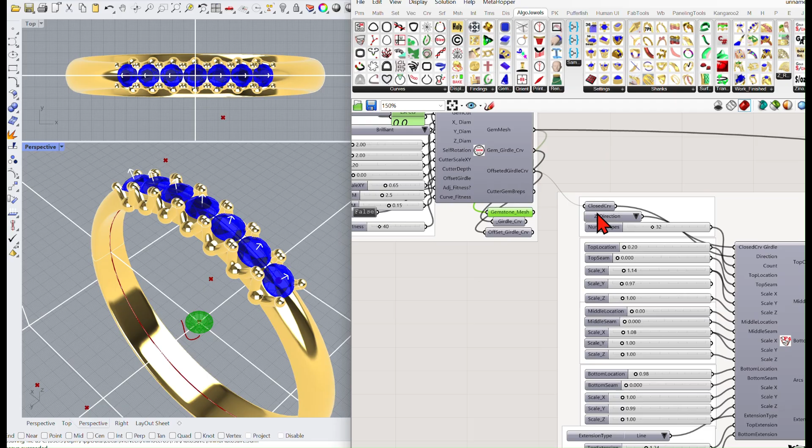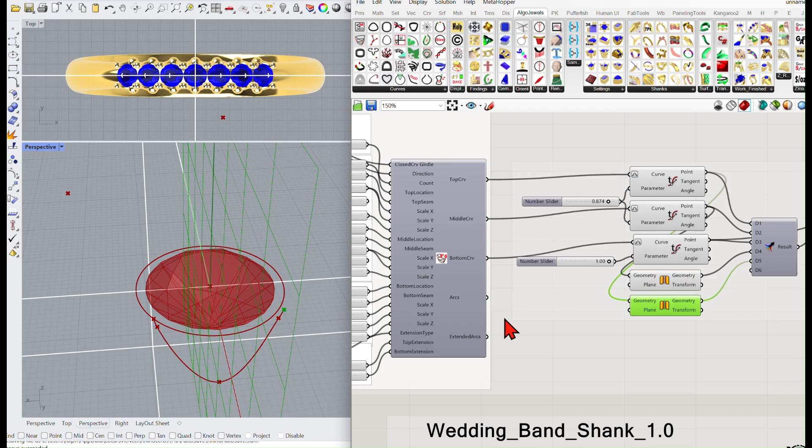We're using a closed curve, which is the offset curve. From the offset curve, we're using points, points, points, points, points, creating this curve.

That we are piping to create the claw here and the sphere here, which we are grouping together.

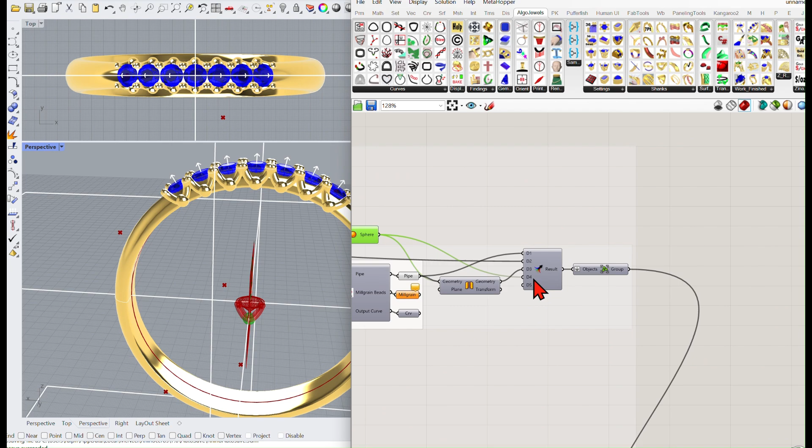And then we are using orient to curve. To find the curve, we're using the wedding band maker. We're using the B-rep to get a surface.

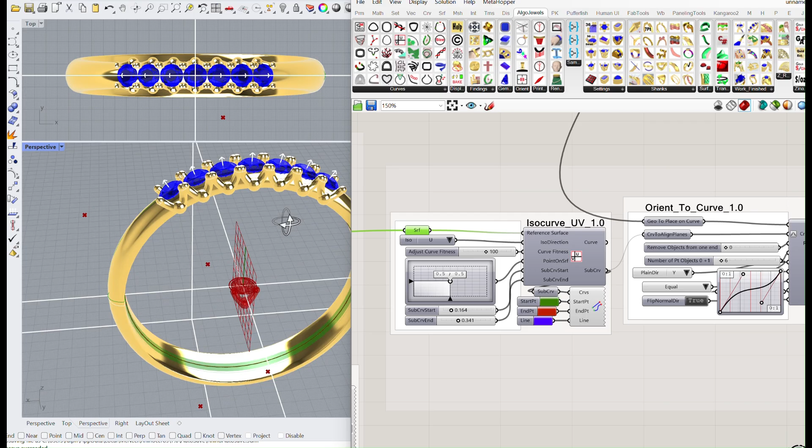And from that surface, we're creating a subcurve. And then using orient to curve to orient these claws onto the ring.

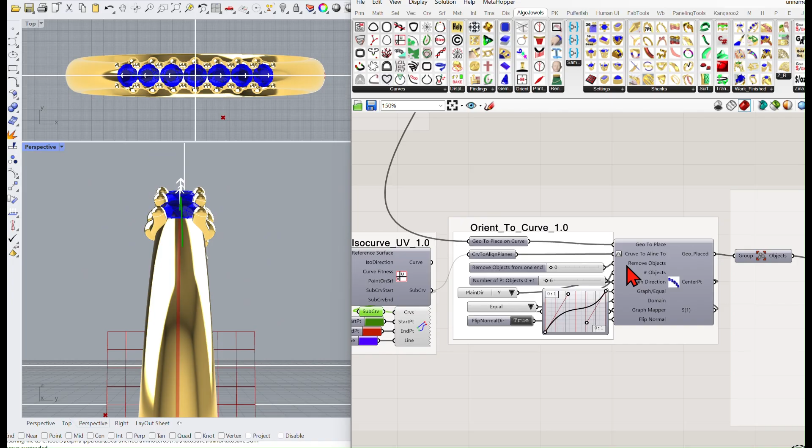You can come up with some fancy ideas, the way to do things, right? This is something different. Probably won't see it, right? But it's innovative, and that's what Grasshopper allows you to do.

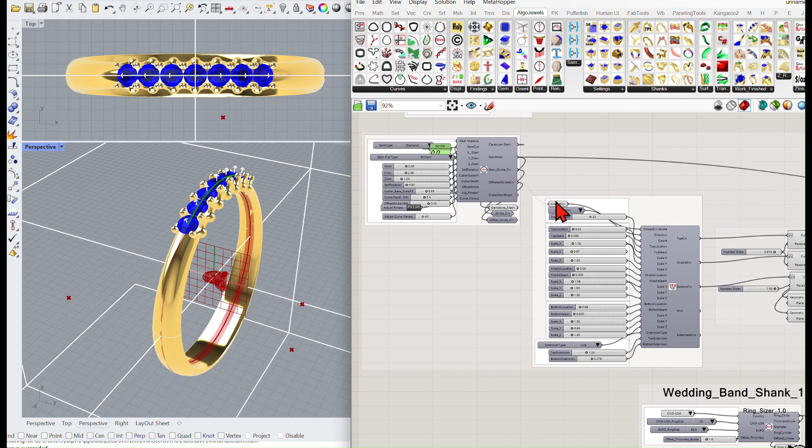Think outside the box once you start playing with Grasshopper and AJ. Thank you for watching.